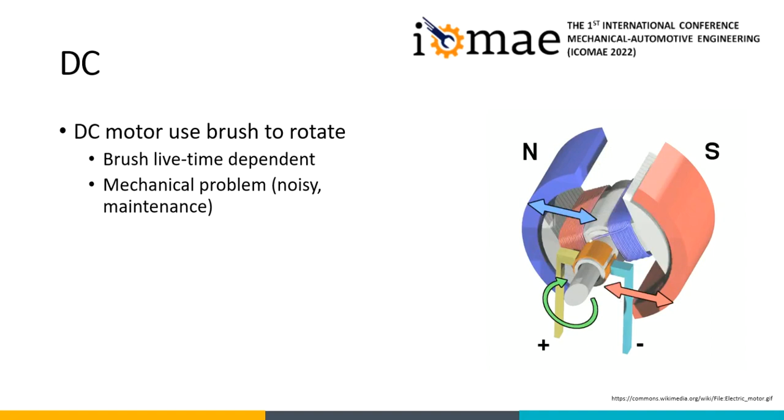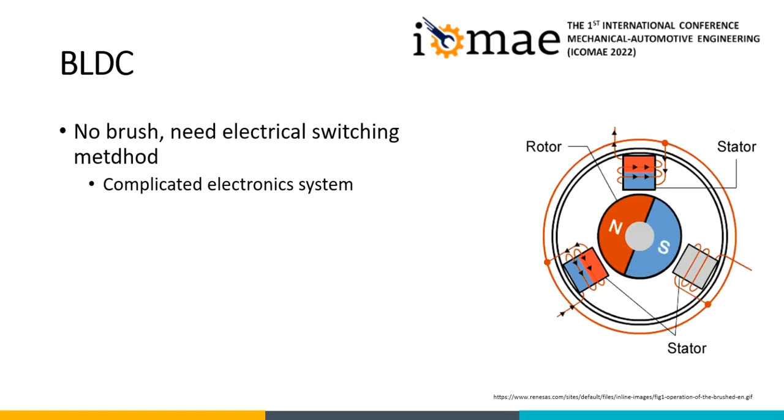Let's start from a conventional DC motor first. It needs a brush to perform the rotation. It can cause brush lifetime dependent mechanical problems such as noise and maintenance cost problems. Then, contrary, in the BLDC motor, there is no brush, but we need a more complex method to control this motor. As I resume, it's a comparison table between DC motor and BLDC motor.

It has much benefit using BLDC motor compared to DC motor. That's why now BLDC motor is used widely, also in electrical vehicles. But we need a more complex method to control this motor. And one of the famous basic methods to rotate the BLDC motor is called the 6-step.

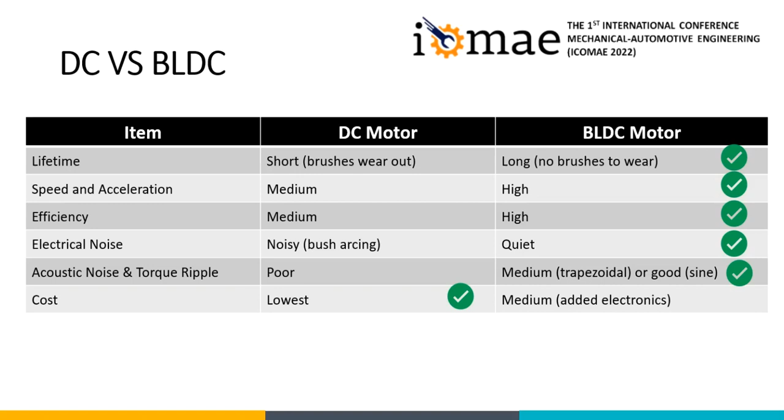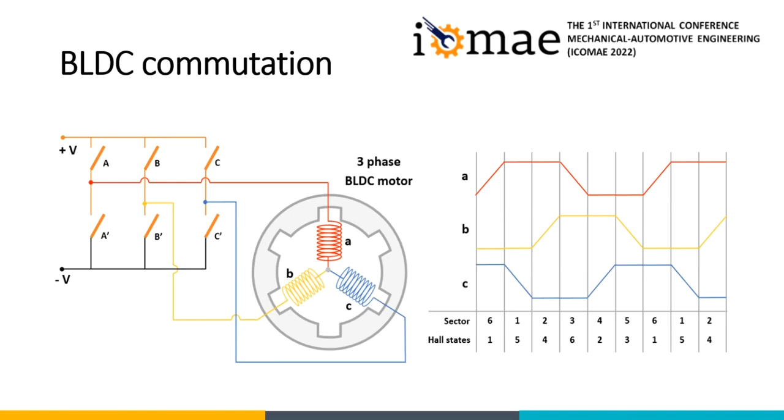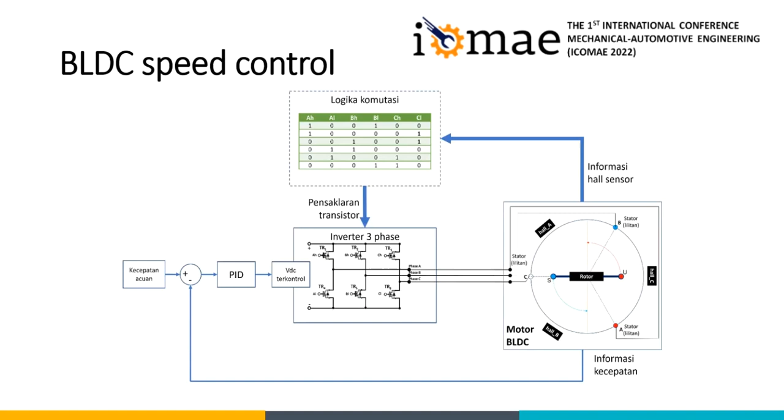These 6 steps use 6 IGBT or MOSFET transistors to switch the winding on and off in a special sequence that enables motor rotation. This is the correlation between the stator winding, the step switching sequence, and Hall sensor signal. The rotor will rotate if the switching follows the proper sequence. This is the complete control scheme that we will discuss today. How to build the simulation in Simulink MATLAB.

First, let's talk about Simulink MATLAB. Simulink is a MATLAB-based graphical programming environment for modeling, using a block library or function, simulating and analyzing systems using virtual scopes. It also can communicate and embed into a microcontroller or digital signal processing hardware, such as Arduino.

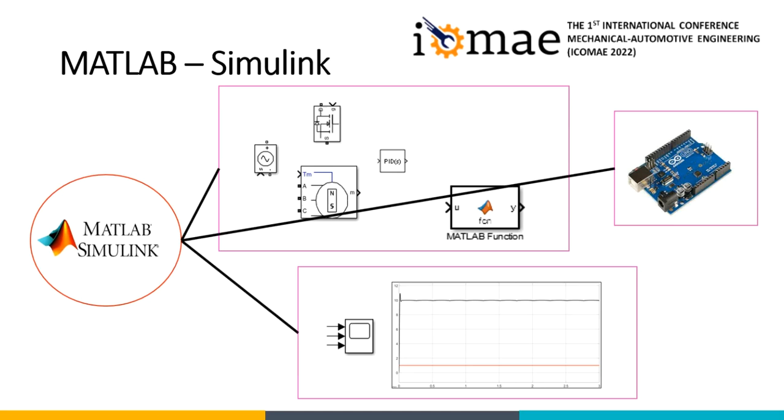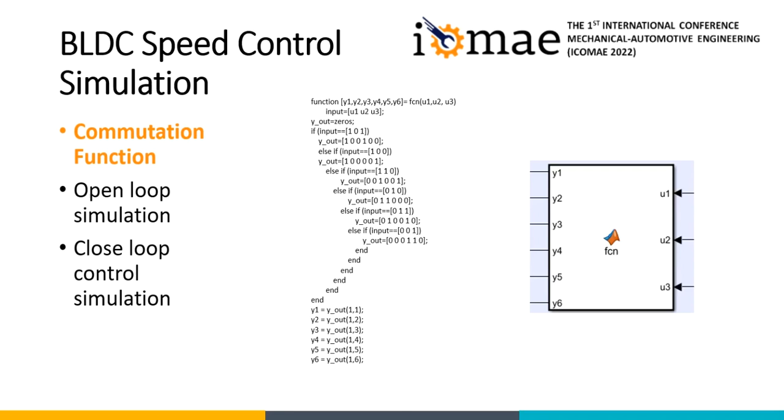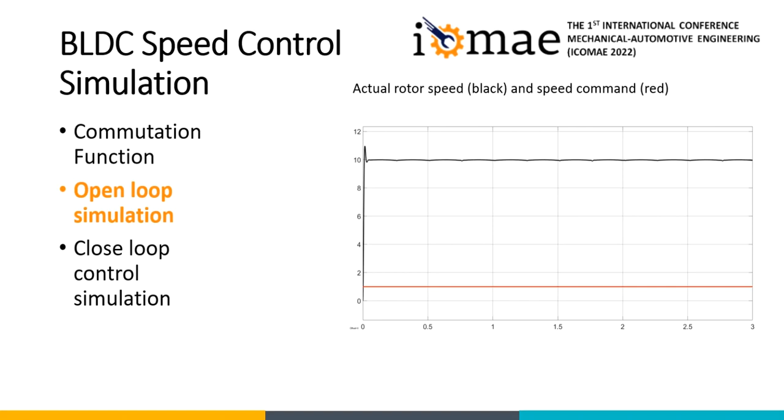Next is closed loop speed control. Nowadays, we can find a lot of control methods, but in this study, we use the most powerful and applicable control method called PID. We need to add some Simulink library blocks to make it closed loop. The blocks are the PID controller and a step function block that represents the load, and make the feedback connection from output to the input. Then we run the simulation and check the result from the scope.

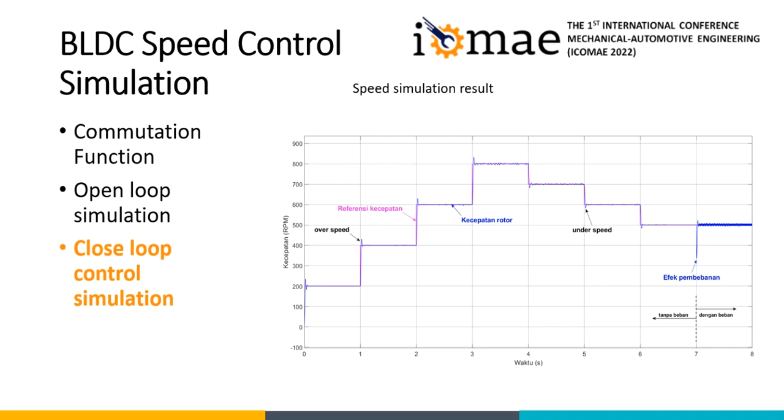Here is the result. The speed command is presented in the magenta line and the rotor speed in the blue line. First, we simulate step speed. We can see the speed response is quite good. From the scope graph, we can conclude that PID can control the speed in the speed up and then the speed down, and can respond well to the load disturbances.

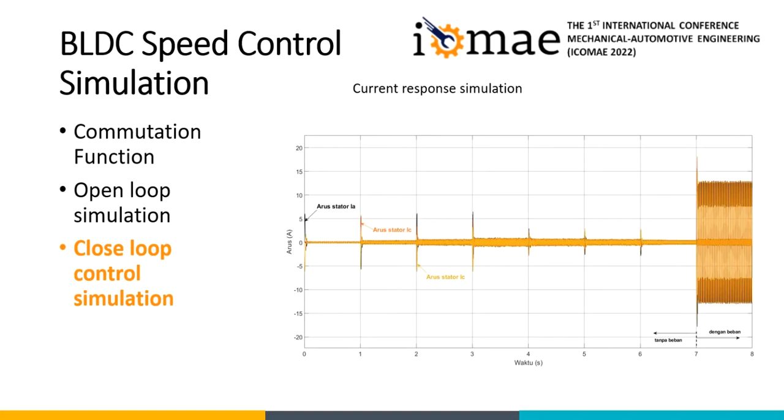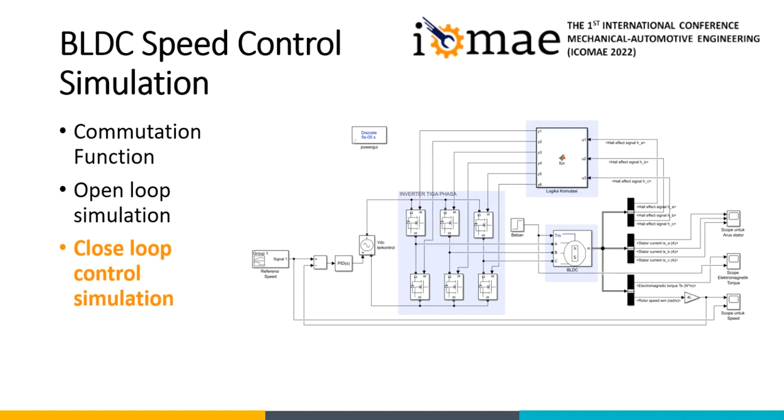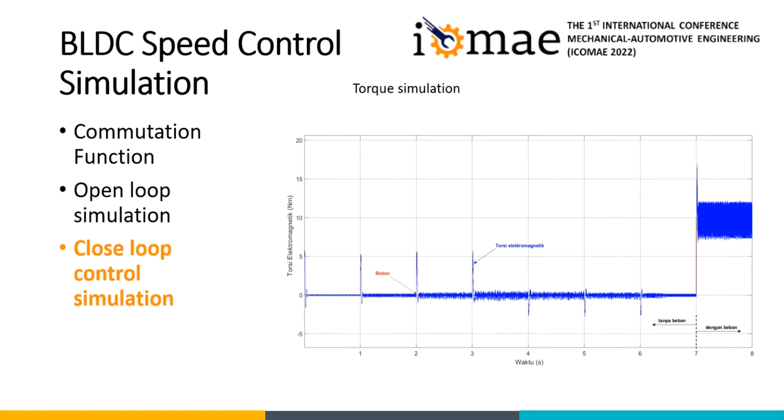Next, in this simulation, we also can find the current response. It can simulate how much electrical current occurs in the system. From the result, it can be concluded that more speed, more current occurs, and more load also more current occurs. Besides speed and current, another response we need to know is the torque. For that, we can check the torque response from this scope. From the simulation result, it can be concluded that more speed, more torque produced, and of course more load needs more torque also.

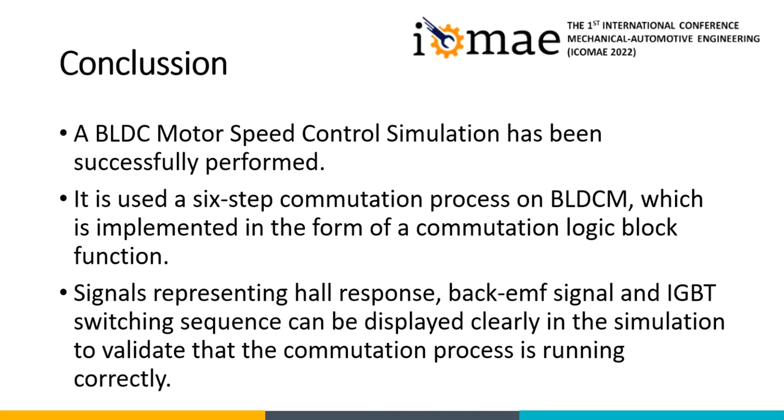After our discussion, we can conclude that BLDC motor speed control simulation has been successfully performed. In this study, we use a 6-step commutation process on the BLDC motor, which is implemented in the form of a commutation logic block function. Signals representing Hall response, back EMF signal, and IGBT switching sequence can be displayed clearly in the simulation. This is to validate that the commutation process is running correctly.

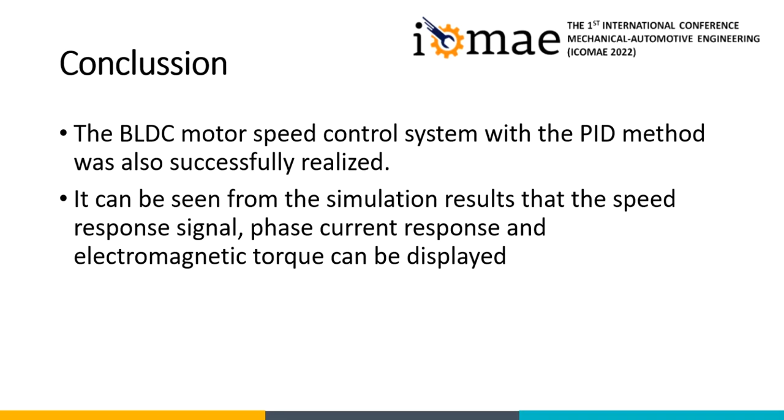And then the BLDC motor speed control system with the PID method was also successfully realized. It can be seen from the simulation result that the speed response signal, phase current response, and electromagnetic torque can be displayed. In the future, we have planned to do the hardware implementation and then another speed control simulation, and also performing another control method.